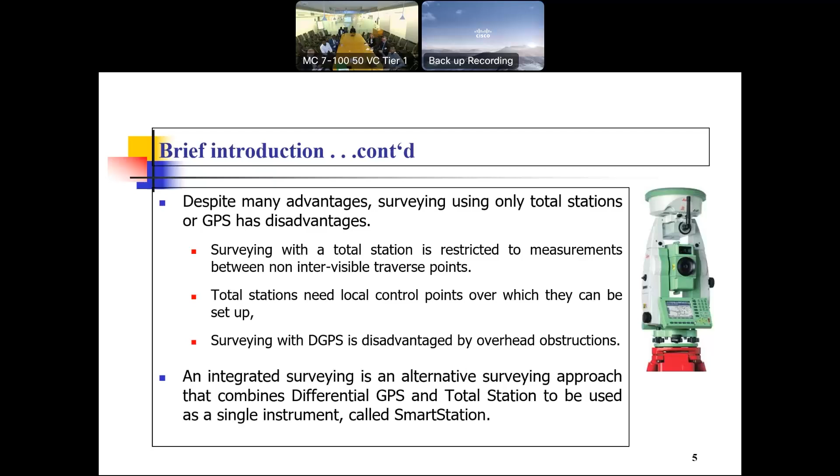When we survey with GPS or differential GPS, it's also disadvantaged by overhead satellite obstruction. So those limitations will be solved by integrating those instruments to be used as one. An integrated survey is an approach that combines both differential GPS and total station as one instrument, which is called a smart station.

As a research gap, the use of total station and GPS has been in use since their introduction. However, they are not flexible in spatial data capture to provide for varying use because of the problems I mentioned. Due to this, practitioners have introduced an approach called smart station, combining total station and GPS together to form a single instrument and operate as a single instrument.

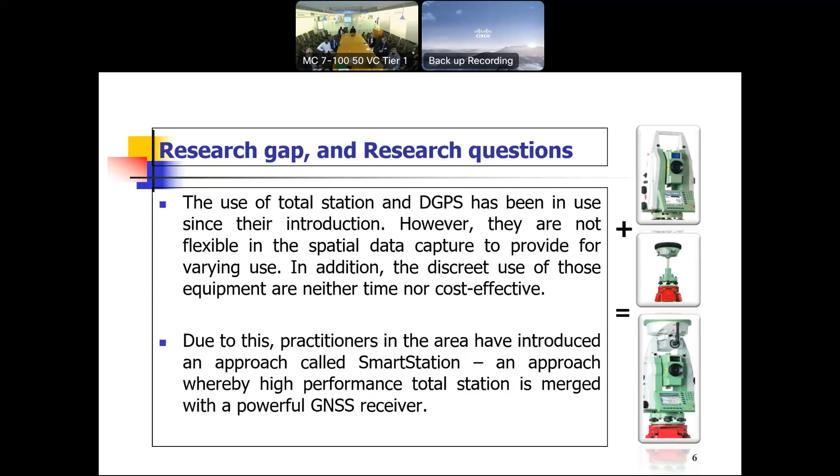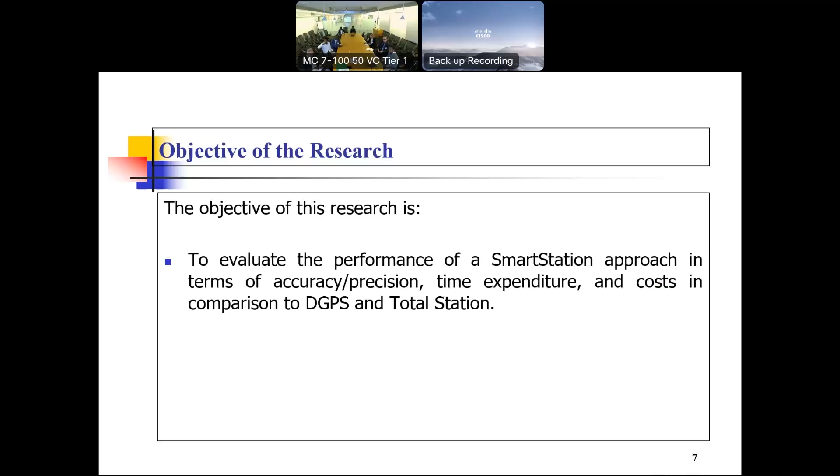My main objective is to evaluate the performance of the smart station approach in terms of accuracy, time expenditure, and cost, in comparison to the separate use of GPS and total station.

As a method, in order to test the performance of these instruments, first I established a network consisting of 9 control points, which were purposely selected in order to avoid satellite obstruction, so that those 9 control points would serve as a reference for the other measurements, since those points are measured accurately.

With 2 faces, especially using total station, I measured 2 faces so as to preserve their accuracy and precision, in order to eliminate some kind of errors.

To investigate this, I used Leica total station 1205, Leica differential GPS equipment, and LGO software to investigate the performance. Finally, TANA CORS, which is a continuously operating reference station located at Bahir Dar University, in order to post-process and make a kind of RTK measurements.

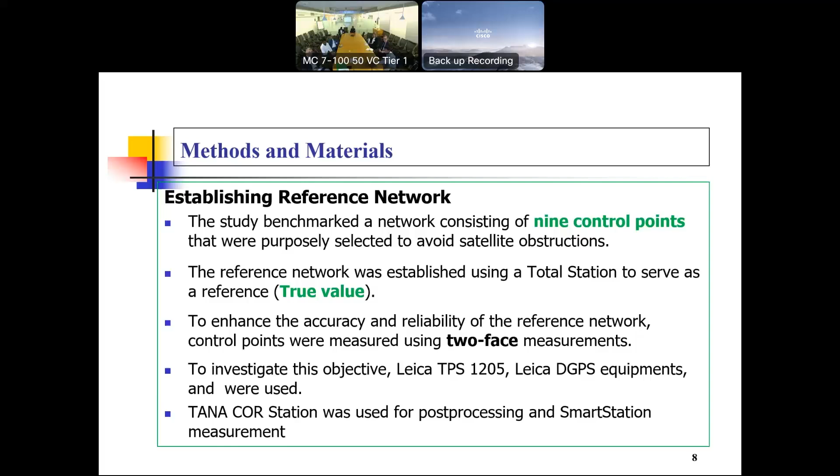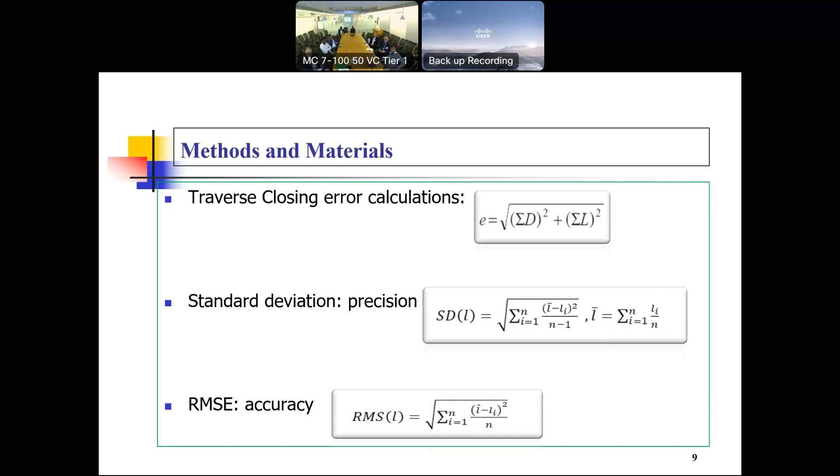Based on this CORS station, I established a reference network. In order to calculate the mathematical calculations related to closing error or misclosure error of the traverse, standard deviation or precision of the measurements, and accuracy of all the measurements, I used all these formulas to investigate the accuracy of all the instruments.

In the beginning, based on TANA CORS, I established 2 points, because when using total station, at least 2 points are needed to establish that network. So the last 2 points, W02 and W03, were established based on the TANA CORS through post-processing, making it possible to obtain below millimeter accuracy level, so we can say these are the best references for the rest of the 9 points to be used as a benchmark.

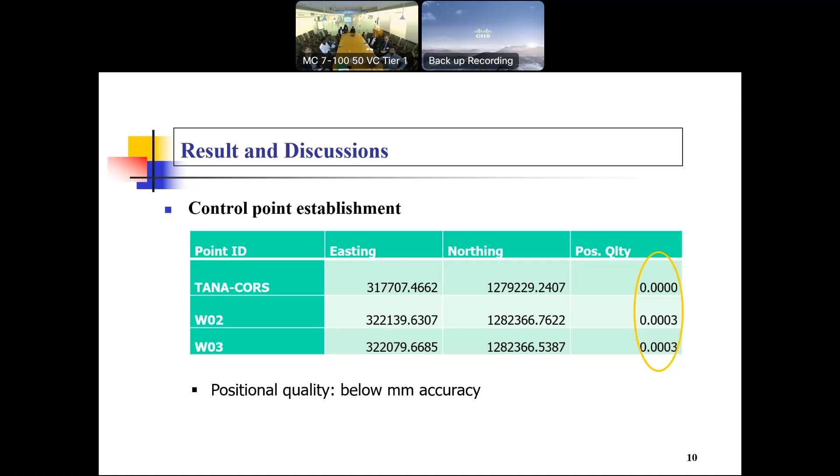So those 9 points were established as a reference value, or true value, because those true values are error-free, or nearly error-free, for the other references, so that based on those reference values, the other approaches will be evaluated based on this accuracy.

This true value or traverse was computed with a misclosure error of 6 millimeters, which is below our standard, within our tolerance limit. So we can accept this one as it is, and use it as a reference value for the rest of the measurements.

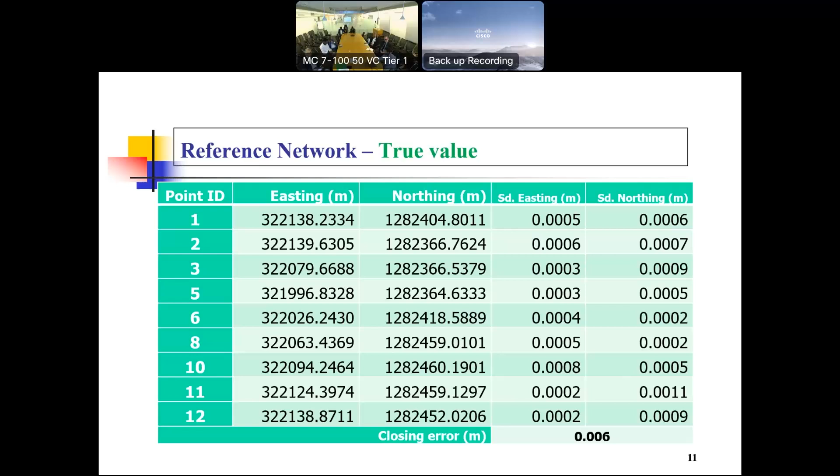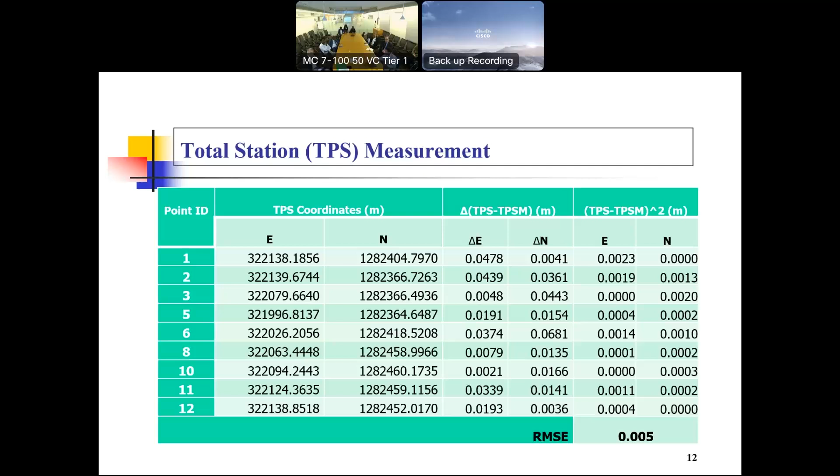So this is the first approach, which should be compared with the smart station, and then in the same point, in the same network, with real-time kinematic RTK measurement.

Also, I have taken that measurement, and in the same way, those differences between the observed values, the RTK value, and that of the reference value, which was taken as a true value, the difference is still within the tolerance limit.

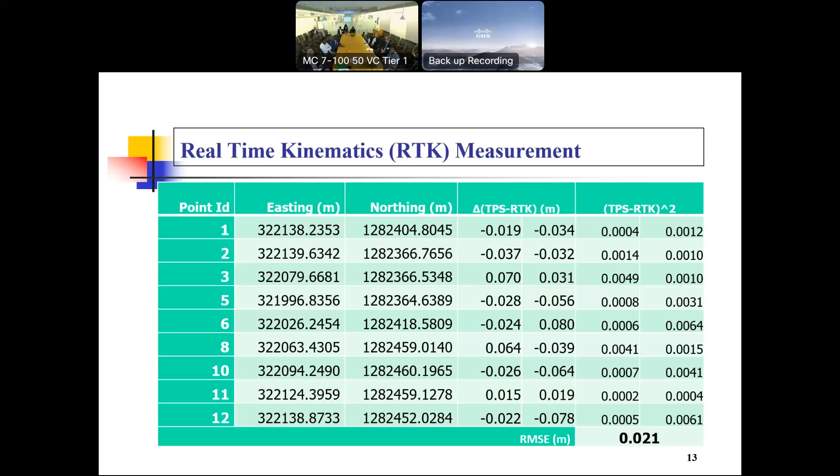So in this case with the RTK, I investigated like 2.1 centimeters. This will also be compared with that of the smart station. Finally, I take also in the same point, in those 9 points, with the smart station approach.

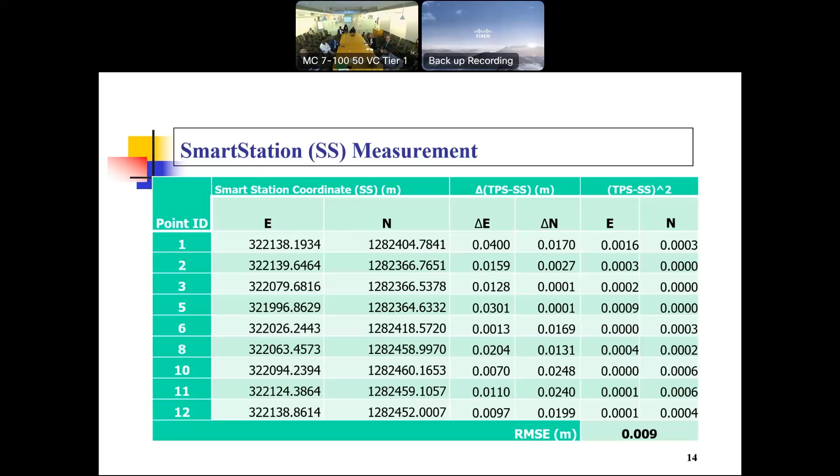The difference is still below centimeter level. The maximum one is observed to be like 4 centimeters. Otherwise, the rest of the measurements are below centimeter and millimeter level. With this measurement, the total accuracy level was 9 millimeters, so that we can compare all those accuracies and see how much the performance of this smart station will be.

Time-wise, or with regard to time expenditure, I investigated for the total station in the same points, the GPS RTK in the same points also, and finally the smart station in the same points, so that with those criteria or procedures of making those measurements, for instance, for setup, centering, target aiming, recording, changing station, and so on.

The total station, in light of instrument setup and prism, took totally 207 minutes in order to establish that network, or in order to measure that network. And with regard to GPS RTK, it took 143 minutes. And finally, with the smart station

the approach took 225 minutes. So we can also compare those time expenditures, because in this case, when we use the separate use of total station and GPS, it consumes separately 207 and 143. If we combine two of them, then it will be like

350 minutes. So we can compare that with 225 minutes, because the same approach, with different approach, but for the same purpose, we applied. But with the smart station, it was possible to save time in order to accomplish the same tasks.

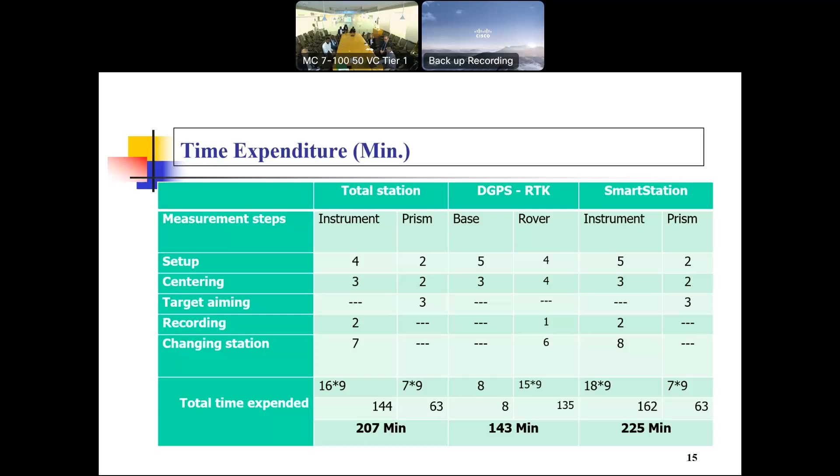With regard to cost expenditure for the total station, almost in USD, it is almost 14,500. For the GPS, almost 32,000, we can say. For the smart station, $33,150. So when we compare this smart station, because it is a combined system or a combined instrument consisting of those two instruments, even cost-wise, it is affordable because of its prices.

So as a conclusion, the smart station approach eliminates the need for control points. There is no need to establish control points running long traverses, because also the big challenge of traverse will not be considered here, and resection approaches in order to establish new points, so that all those challenges and problems will not be the issue in the case of smart station.

Accuracy-wise, the smart station approach provided a precision of 9 millimeters, which is within the tolerance limit of our cadastral standard. That compares to the total station's 5 millimeters and the RTK measurement's 2.1 centimeters.

With regard to time and cost, you can see for the time, 350 minutes was consumed in order to establish that network, or in order to take measurements of that network in those 9 control points. But on the other hand, only 225 minutes was consumed in order to establish that network with the smart station. So we can see time-wise how much we can save through using this approach.

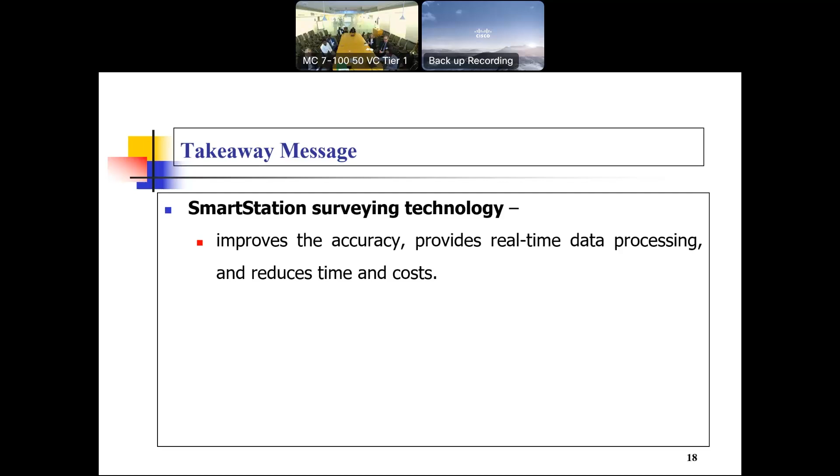Thank you very much, Salah. Are there any questions or comments?

Yes, please. Did you find any disadvantages with the smart station? Do you think it was easy to use? Do you think people would need more training to use it? Or do you think if you know how to use the other two systems, you could use it fairly easily?

Still, as long as we are using those conventional instruments, I am comparing with the separate use of that instrument, so I didn't get a disadvantage with that. In most cases we use orthophoto or aerial photographs, but when there is a gap implementing through that orthophoto, we use this one to fill the gap. Otherwise, the major issue is cost and time, so it saves those parameters compared to the separate use of total station and GPS. In my case, I am really happy with that one. Thank you. Any other comments?

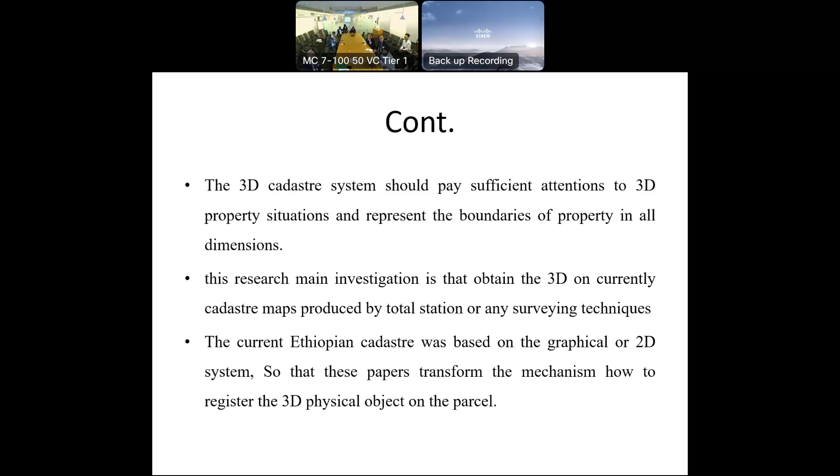Only 10% of the land is registered under the cadastral system, meaning we haven't started very well with cadastral systems yet. But for condominiums and apartments, there is a push to do 3D cadastral system, so that these two systems will integrate together. By presenting this paper, I hope to get comments on how to integrate this 2D system to a 3D system.

The problem today is vertical urban development, common in all countries of the world, including Ethiopia. Recently, condominium housing has become strategic for the Ethiopian federal government, and allocating urban land to high-rise or row houses and condominium buildings helps maintain the beauty of urban areas and accommodate people, since people are expanding into rural lands, which affects both urban and rural areas.

Since the condominium house is divided into several units for different ownership, the main problem is to clearly define and protect the rights of 3D property in the cadastral system. Therefore, a 2D system cannot adequately manage and represent the spatial extent currently happening in the country, though 3D cadastral systems are not yet registered in Ethiopia.

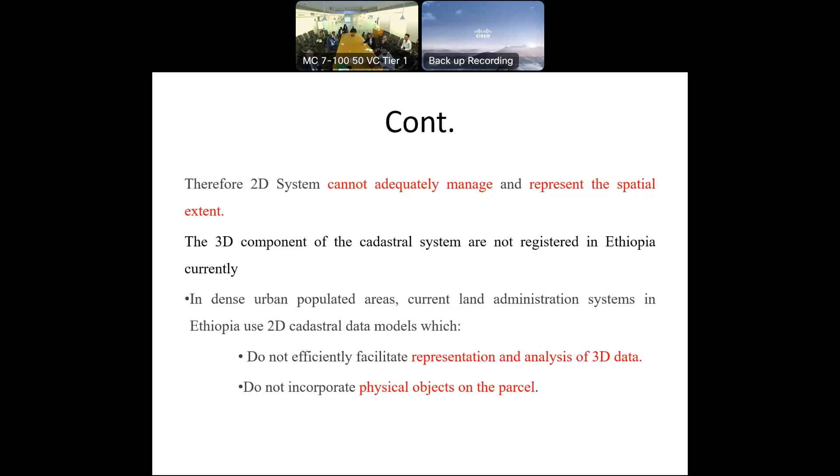In these urban populated areas, the current administration system in Ethiopia uses a 2D cadastral data model, which does not efficiently facilitate representing and analyzing 3D data, and does not incorporate physical objects on the parcel. Because of these problems, a 3D cadastral system should be applied or realized in our country.

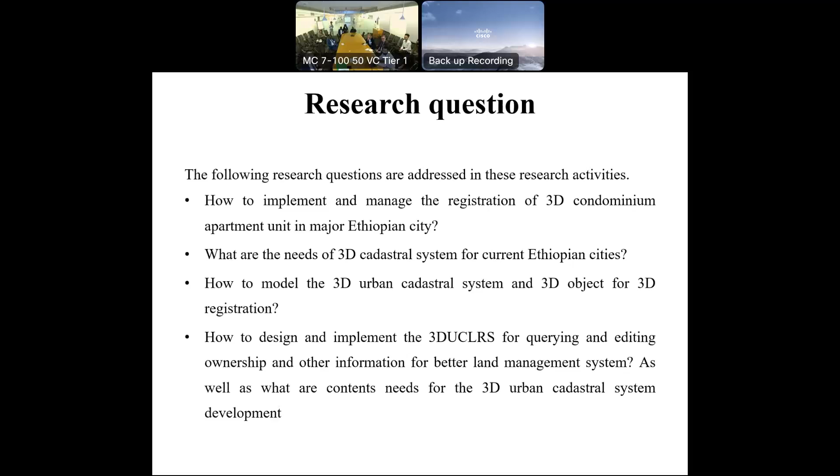So the main objective of this paper is to study the developed urban land system and transform the 2D system to a 3D cadastral registration system. My research questions are: how to implement and manage registration of 3D condominiums, what are the needs of a 3D cadastral system, how to model a 3D urban cadastral system or 3D object registration, and how to design and implement a 3D urban cadastral land registration system for querying, editing, ownership, and other information for better land management. These questions should be answered in the paper.

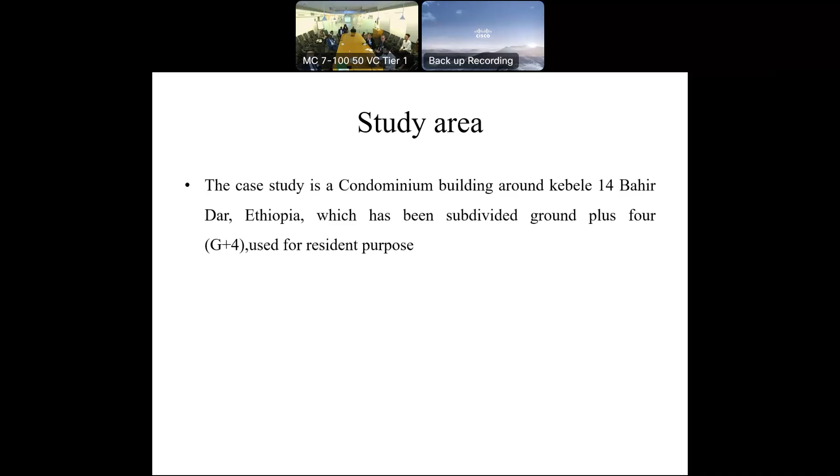The case study area is a condominium building around Kebele 14, Bahir Dar, Ethiopia, which has subdivided ground plus 4 buildings used for residential purposes. This is the condominium where we are practicing and doing our experiment, using different measurement systems to implement the 3D cadastral registration system.

Condominium house registration in Ethiopia: condominium is a name given to a form of housing tenure where resident households own their individual units and equally share ownership and responsibility for communal areas and facilities of the building, such as hallways, heating systems, and elevators. All these things are accommodated when we register a condominium.

Condominium as defined by the Ethiopian system is like this: usually the external maintenance of the roof and walls is undertaken by the condominium association, which jointly represents ownership of the whole complex, employing strict management to ensure funding from each homeowner. This association consists of representatives of all condominium residents who manage the site through a board of directors or elected association members.

What about 3D data and 3D models? When applying 3D data and 3D models, the 3D data are captured by ground survey. This is a key task for this work, and the next step is spatial modeling of the urban cadastre. So what we did here is use a ground surveying approach.

Using the ground surveying approach, we collect all corners of the boundary with its elevation using a reflectorless EDM mode measurement system. That means reflectorless mode: our instrument, the latest type, has both modes of measurement, reflector mode and reflectorless mode.

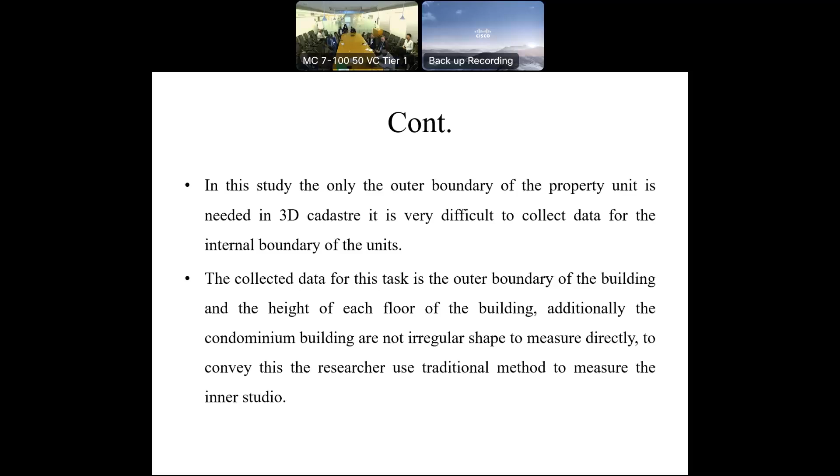So, 3D urban cadastral land registration system. Recently, Ethiopian cities show very rapid growth in different activities. One of these developments is urban development. We can see urban development in two ways, horizontal and vertical, as I already informed about this one. The vertical development is increasing very much in different Ethiopian cities.

So to overcome this, we need condominium apartments in every Ethiopian city. Because of that, this property has to be registered to secure the property. So securing the model data in one package for the urban cadastre system is very necessary. We have to develop an urban 3D cadastre system to accommodate all these 3D cadastre systems.

To develop this easy user interface, 7 different packages are needed to support the 3D cadastre registration system. There are 3D object holders, 3D property objects, 3D geometry, 3D survey points, 3D survey observations, and 3D external sources. All of these are applicable when we are implementing or designing the 3D cadastre systems.

By the way, when we are working on this 3D cadastre system, we have different types of teams, like the surveyor team, computer expert team, and GIS expert team, so that all these teams work together to implement and work on the 3D cadastre system.

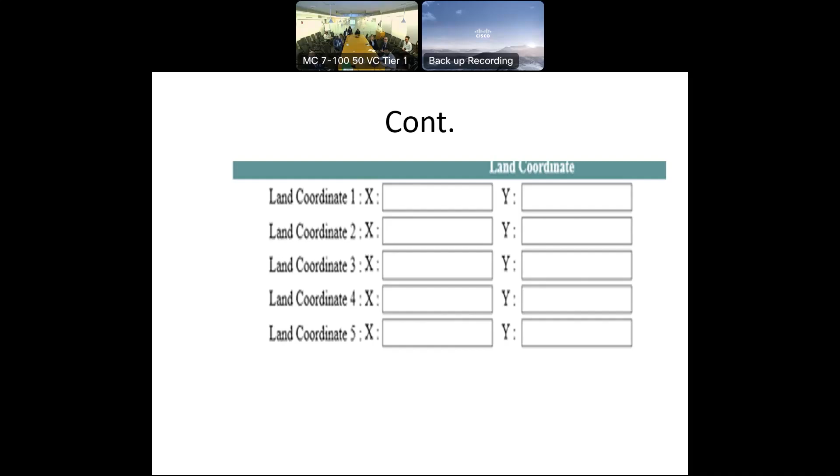And we have land coordinates, the X-Y coordinates. Also, when implementing a 3D cadastral system, we have to add the Z coordinate. We need the Z coordinate for every floor.

After designing that, visualization is the main concept. Without visualization of 3D objects, 3D property cannot be represented in the so-called 3D cadastral map, which shows the location of the object and property in space. The aim of visualization is to show the location as well as the context of 3D cadastral objects, highlighting them on the same page.

So when we enter every code or every land parcel, we have to visualize where that place and location is.

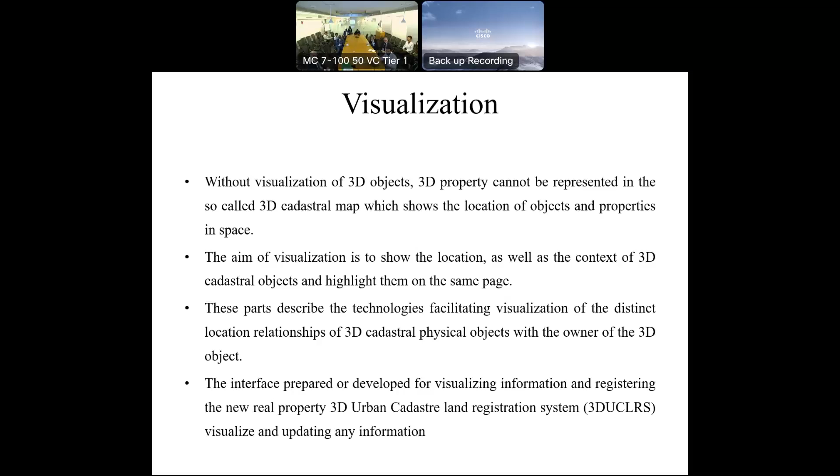So the interface is prepared and developed for visualization, information, and registration in the new real property 3D urban cadastre system, allowing us to visualize and update any information anytime it's needed. Then the main output of the query or visualization shows the precise boundary of the property unit and its 3D location.

This space may be delimited by the physical wall or fence of the parcel, and the visualization of the cadastre illustrates the distribution of occupations, partition of land parcels, spaces, and urban space, giving a clear idea to users and supporting decision making for the government - the boundaries of the cadastre and statutory or legal geographic services.

The report delivery for the customer is also visualized in the report column. So after looking at all the information, we can query the page - we have designed the query page so we can select and search needed information, and we also have the report page. After searching for the necessary value or parcel of land, we can print out the report page.

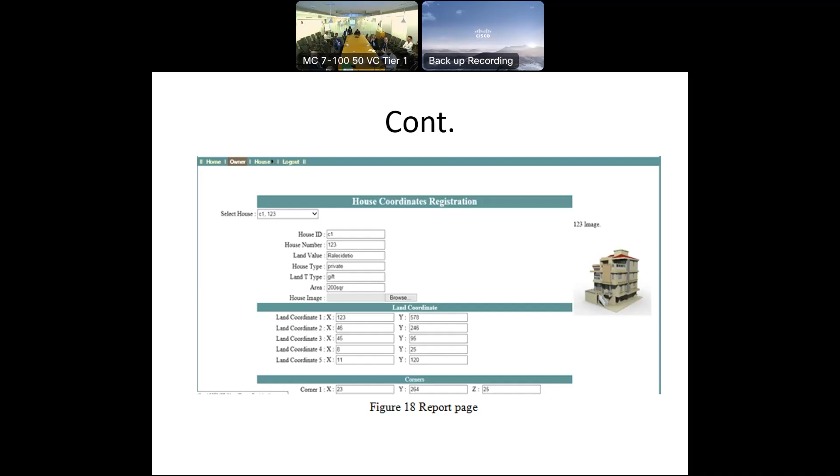As a conclusion, a successful 3D cadastre system contributes a unique tool and lever for any effort for sustainable development in urban land planning and in every aspect of technical, financial, social, and legal issue of our everyday life. It can also be used as a means for political decision and pressures.

Before I finish, I write the last message here on my mobile: Integrated surveying approach, both traditional and modern system, will be applicable for the realization of 3D cadastre system. Wonderful. Thank you very much.

Very good, I'm very pleased to hear that. Are there any questions or comments for our distinguished speaker? Let me start. Definitely it's very important when we talk about urban planning and the third dimension. You've already gone through this. What is the status at the moment of the system? You've tested it, and provided some of the dimension opportunities for managing those. So is this something that the government is now adopting and going ahead with? If they did, or have you started with that, how far have you gone, or what is the next plan?